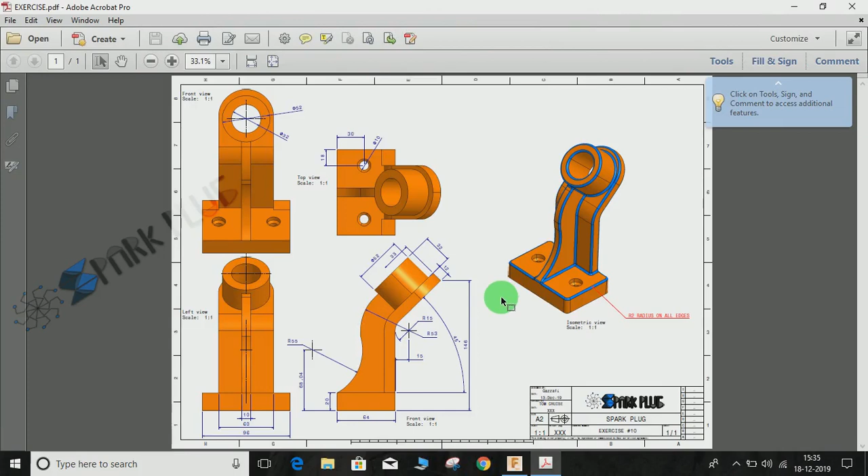In this video tutorial I'm going to show you how to make this body in Fusion 360 using this 2D drawing. You guys can find the downloadable link to this file in the description below, so don't forget to check that out. So what I'm going to do is I will start by making this front view, then I'm going to make some extrusion, some hole commands, and some radius in the end to make this final touch-up.

Remember, the radius of R2 has been removed from all the views except from the isometric view to better understand the dimension. So I will start by making this profile.

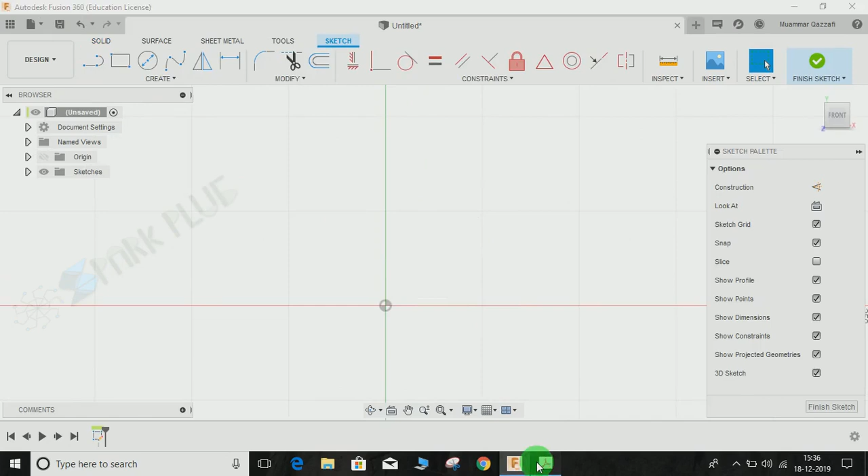For that, just go to select sketch and go to front plane. Now I will start by making this bottom rectangle of 64 by 20. Select a 2-point rectangle, draw a rectangle like this, press D for dimension, give this a dimension of 60 and give this a dimension of 20 like this.

Once done, I'm going to draw this profile like this. As you guys can see, the distance from this point to this point is given 146, and also the angle between this line and this point is given 45 degrees.

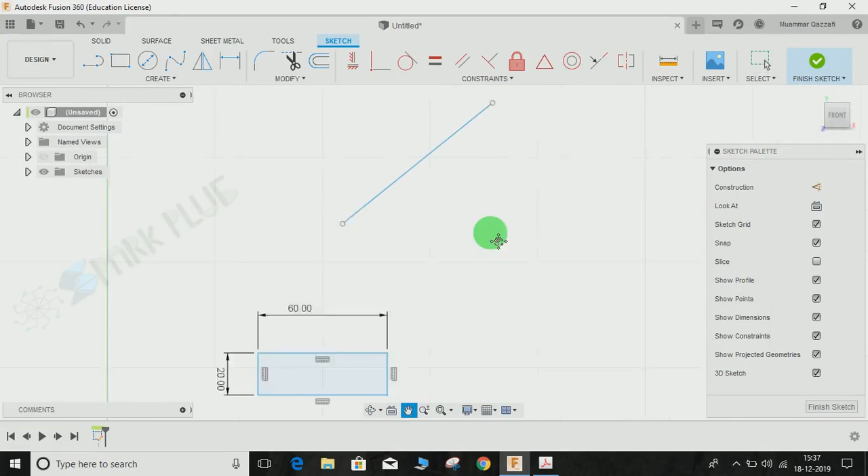So what I'm going to do is I will draw a rough line like this and press D for dimension. From this point to this line, I'm going to give it angular dimension of 45 degrees. Once done, I am going to select this point and the bottom line, and the dimension as written here is 146. So I'm going to give this dimension of 146 and press enter.

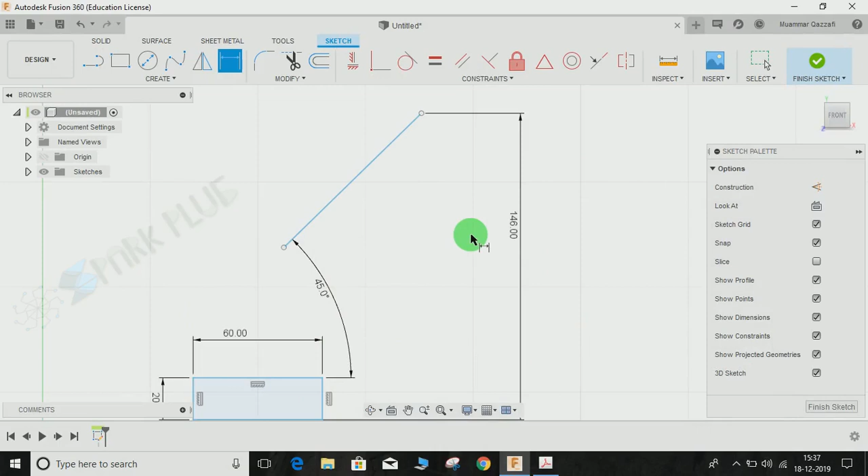Now what I'm going to do is I'm going to extrude this line from this point till the point it joins. Press T for trim, remove these two lines like this.

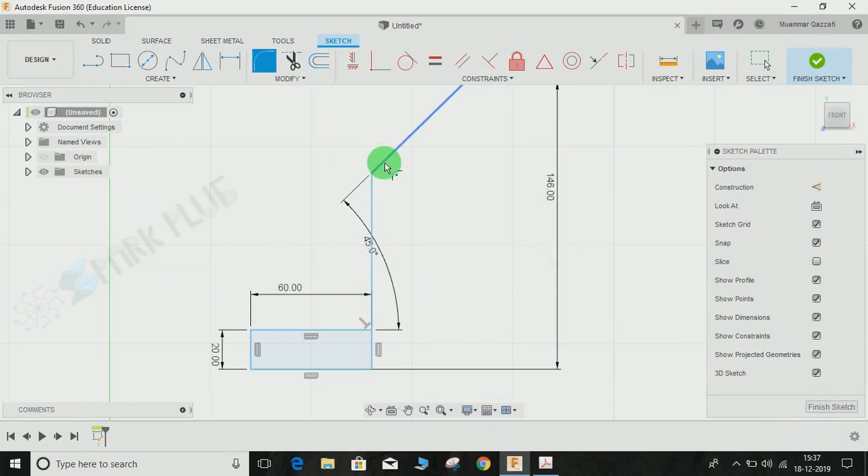Once done, I'm going to make a radius over here, and the distance for radius is given here, it's R15. So I'm going to select the fillet, select these two lines and give it a radius of 15.

Now once done, I'm going to give it a thickness of 12 mm. As you guys can see, this profile is offset by 12 mm to make this rectangular profile here. For that, I'm going to select this line, this radius and this line, and I'm going to select offset.

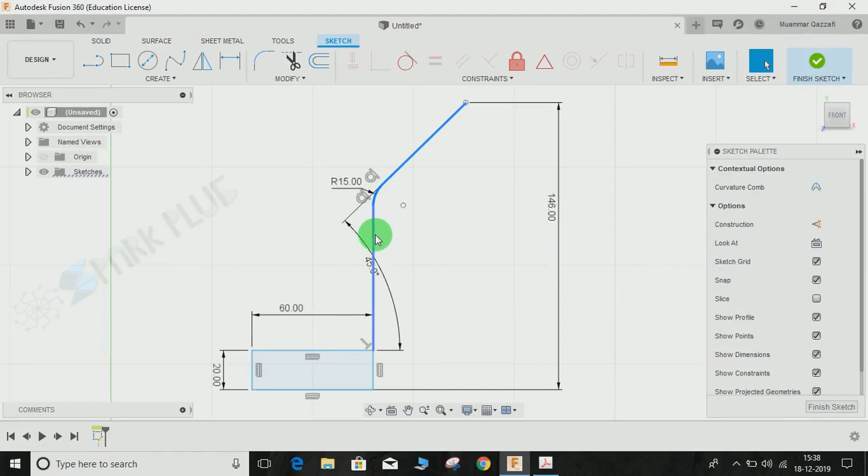Now offset distance direction would be opposite, minus 12, and you may press enter. Once done, press L for line and join these two lines to make the sketch closed. Once done, you may finish the sketch.

Now I'm going to extrude this to a certain distance. If you just look at the right view, the left view, the extruded distance of the bottom rectangle is 96, and this profile, the extruded distance of this profile is 63.

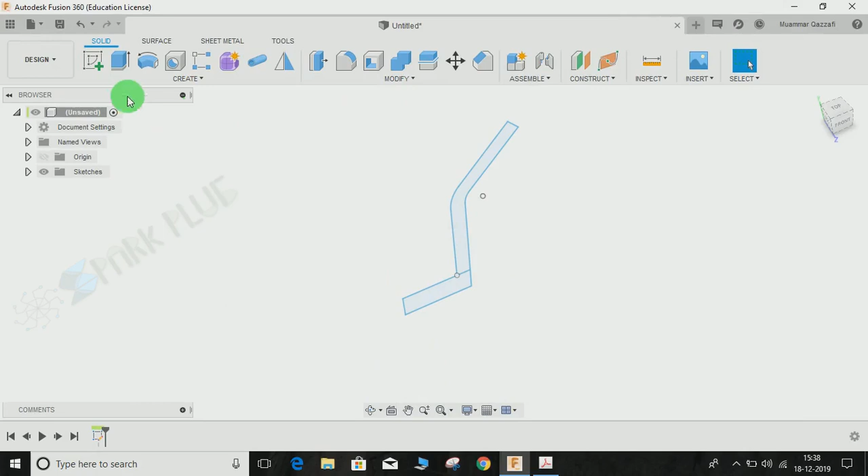So what I'm going to do is I'm going to extrude. The direction would be symmetric. First I'm going to select the bottom rectangle. This time I'm going to select the whole length, and the whole length is going to be 96, and you may select new component and press OK.

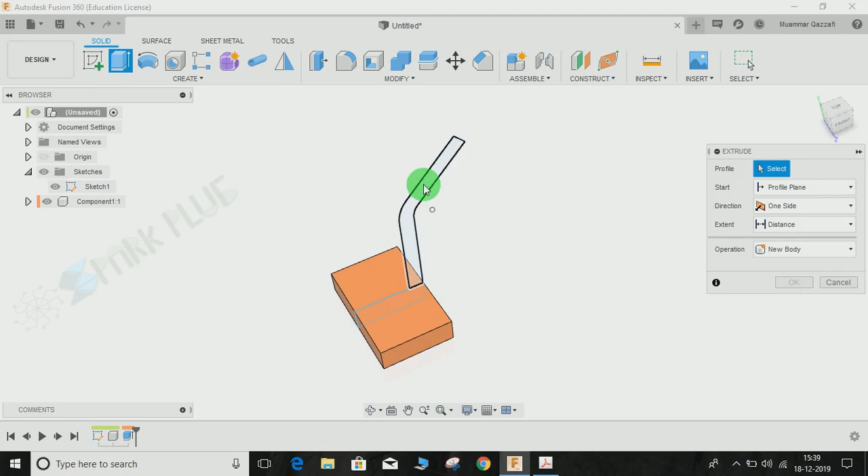Once done, just switch on the sketch again and click on extrude. This time select this part and the operation would be join. The direction would be symmetric, and select the whole length, and the distance would be 60 mm like this. Now you may hide the sketch as we don't need them now.

Now if you just look closely on this circle, this is a circle and the dimension of this circle is given here. The outer dia is 52 mm, and the distance from the center to the end point is given 30 mm, and the extrude distance is 30 mm.

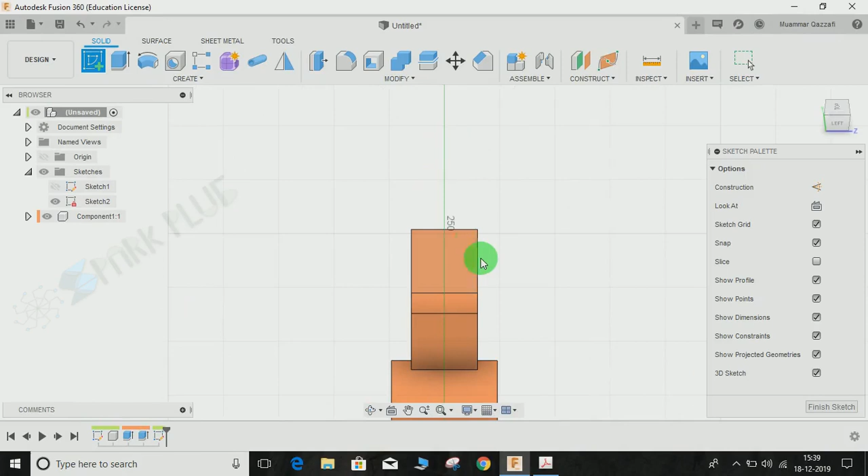So what I'm going to do is I'm going to make this whole circular profile. For that, I'm going to create a sketch on this plane like this. Draw a circle from the very center, and the dia would be 52 as given here. The dia is 52 and the distance from the outermost point is 33.

So what I'm going to do is I'm going to press D for dimension, select this point and this line and give it dimension of 33, and you may press enter.

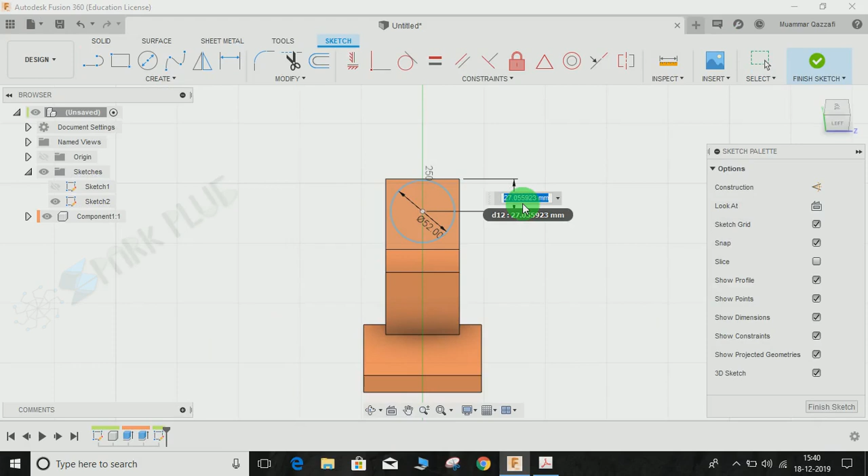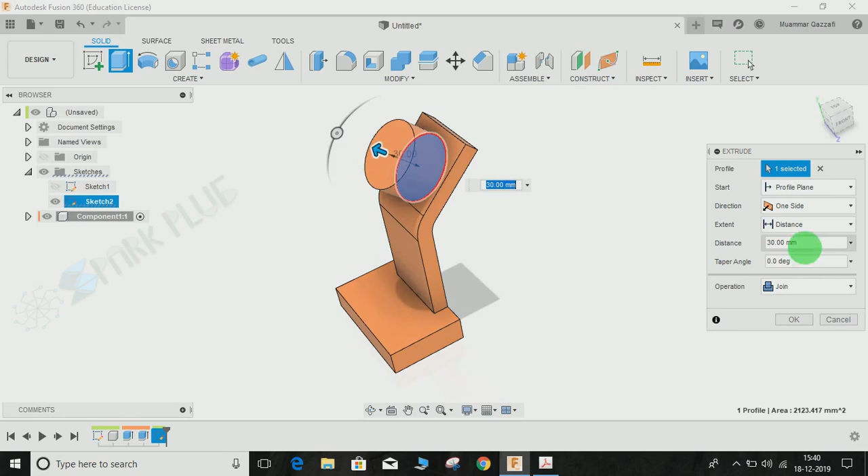Now once done, I'm going to extrude it up to a distance of 30 mm. Finish the sketch and click on extrude, select the circle like this and extrude it up to a distance of 30. The operation would be join, and press OK.

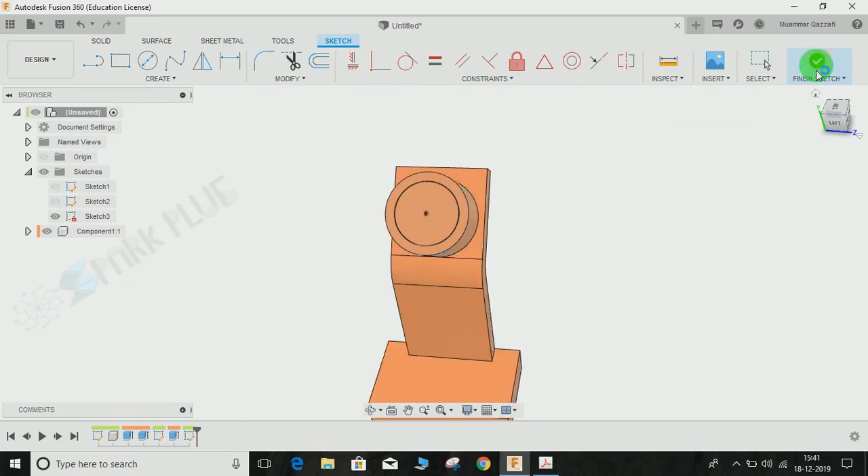Now once done, again click on this circle and press C for circle, and draw a circle of radius 20 mm, that is dia 40 mm, and we are going to drill a hole through it. So for that, just extrude it and the operation would be cut.

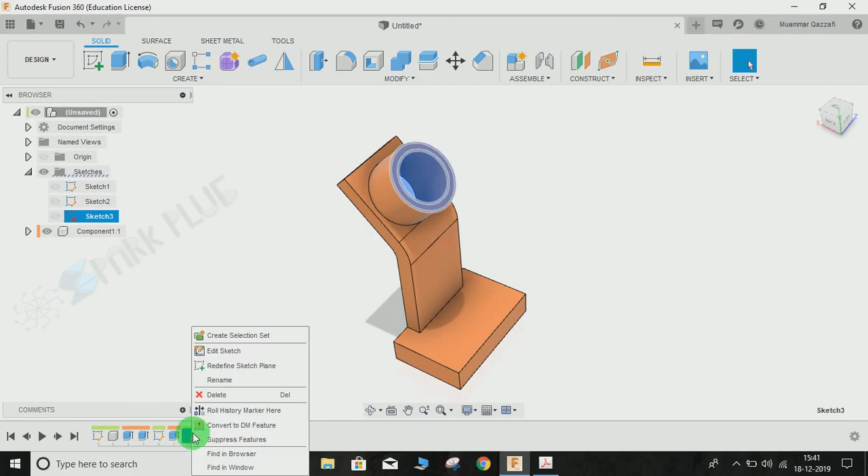Now once done, I need to select the dia. We've just drilled the hole, but the dia of it is going to be 32, not 40 mm. So what I'm going to do is right click on this sketch, click on edit sketch, and give it the dia of 32, then finish the sketch.

Now once done, click on the fillet command and give these two lines a fillet, and the fillet radius would be 30 mm, and press enter. It will look something like this.

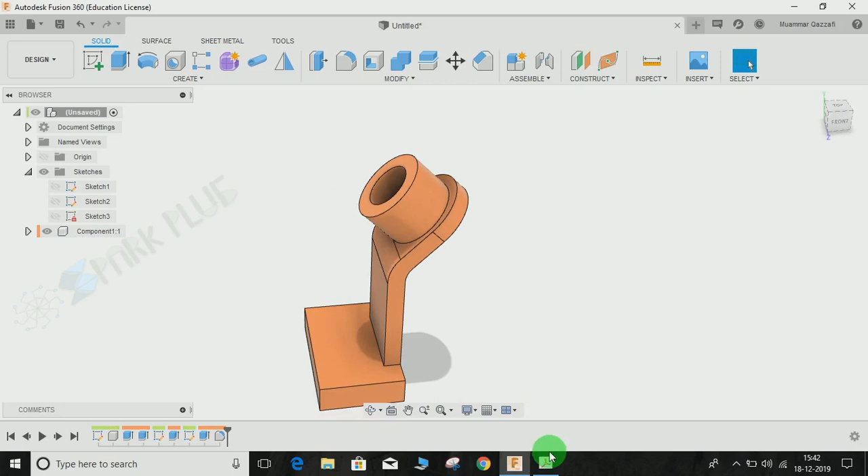Now the last step is to make this S-like profile in the front plane, right in the middle, and the extrude direction thickness, given in the very left view, is 10 mm thick. So what I'm going to do is click on create sketch, and right in the front plane I am going to create the sketch for that.

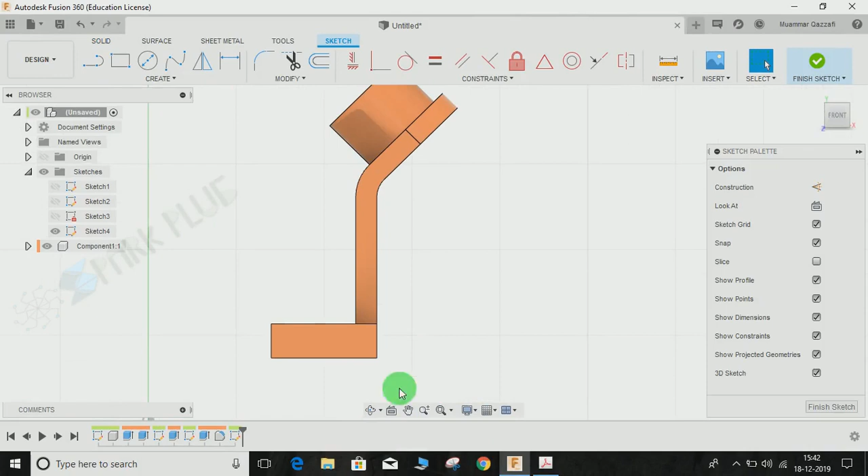So what I'm going to do is press P for project, and I'm going to project this line and this line, and also this one, and press OK.

Now once projected, what I'm going to do is make two circles like here, given here. This circle is going to be concentric with the radius one, and the center of this circle is given here.

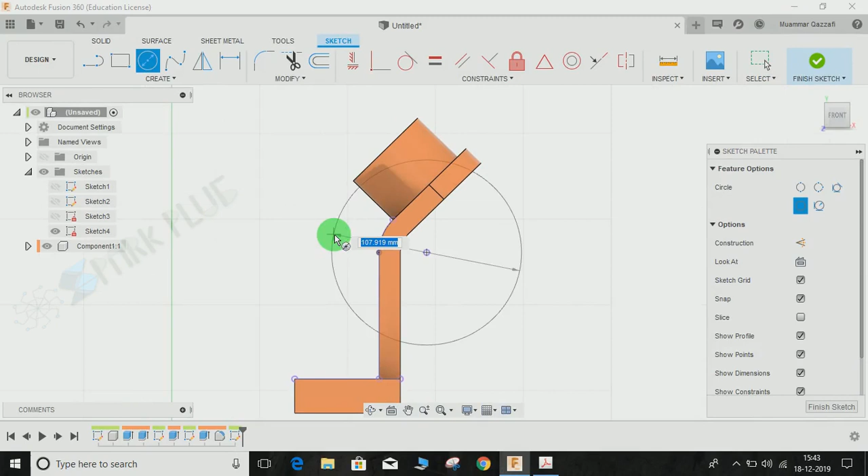The first circle is of radius 53, as you guys can see here. So I'm going to make a circle right from this point with a radius of 53. 53 multiplied by 2 is 106, like this.

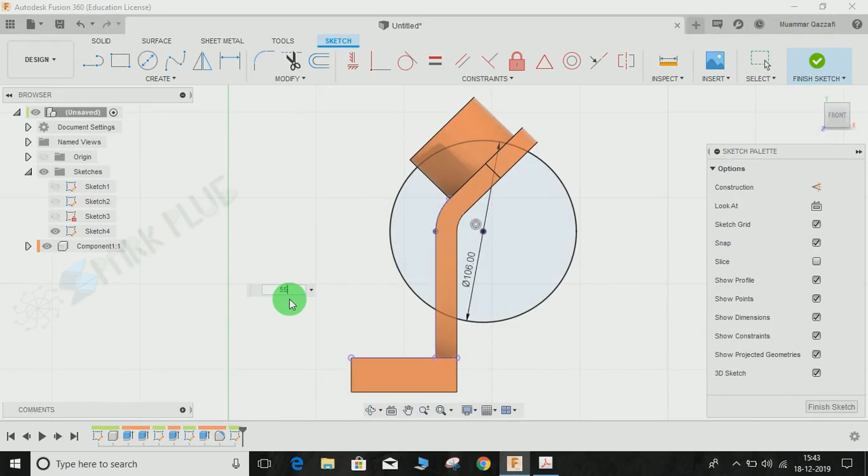And the other circle of radius 55. So draw a circle somewhere here of radius 55 into 2. The dia is 55 into 2, that is 110.

Now once done, I need to make the tangent relation between these two circles, and the second thing is I'm going to make a coincident relation between this point and this circle.

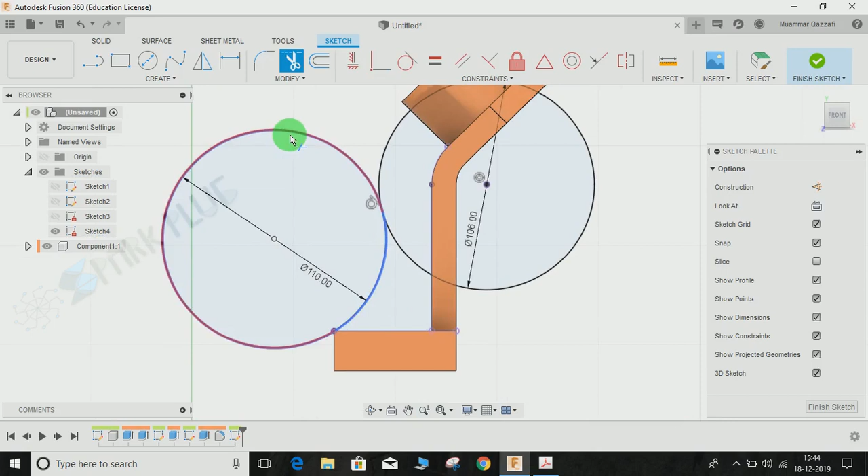Now once done, press T for trim to remove the excess lines. I'm going to remove this line, not this one.

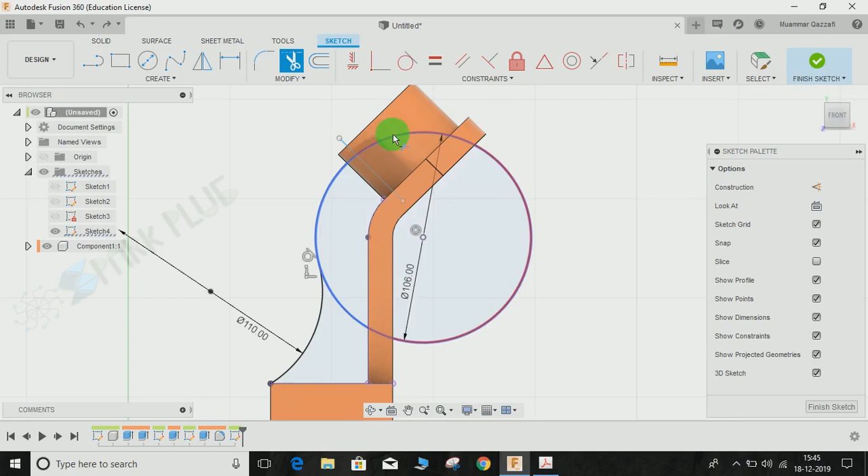One thing I also need to do, the sketch is not closed yet, so I'm going to press P for project. Now I need to draw a rough line like this over here. Press T for trim, just trim this line. No, press Ctrl Z. We are going to trim this line, then trim this one. Yeah, now the sketch is closed.

I need this closed figure. Now you may finish the sketch.

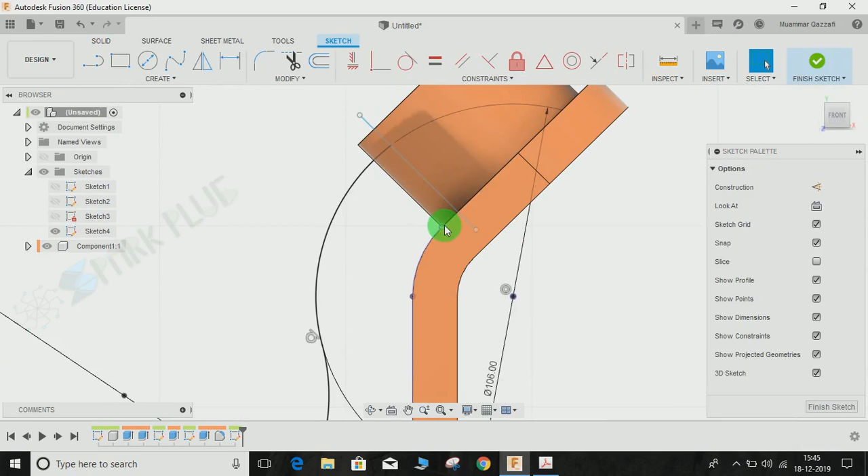I think the sketch is not closed yet. Again, just go back and click on the sketch. Yeah, our sketch is not closed, this is open. So draw a line from here to here so that our sketch is now closed. Now you may finish the sketch.

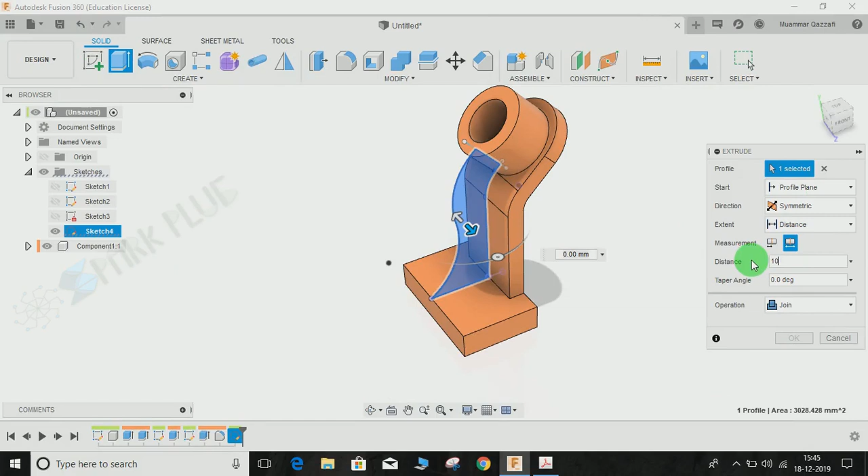Remember the thickness was given here, 10 mm. So press extrude, the command would be join, the direction would be symmetric, whole length, and the distance would be 10, and press OK. Now this is how our body will look like after completion.

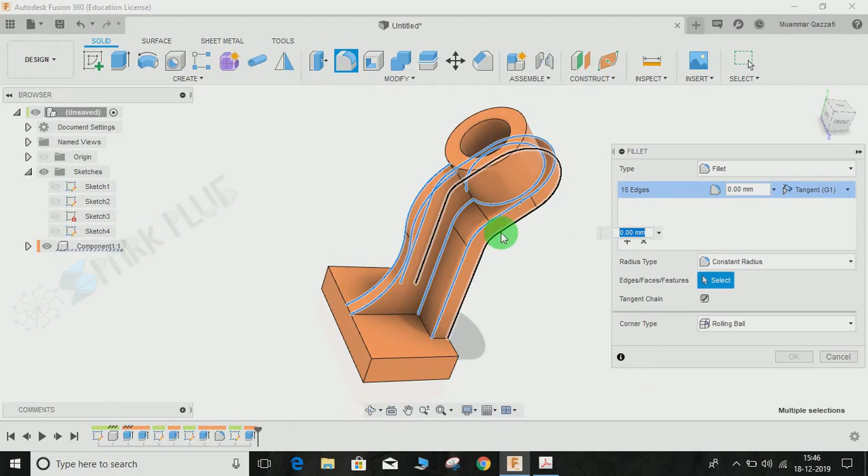Now the only thing left is to provide these radius of 2 mm all across the edge. So for that, just click on fillet, select this line, these edges like I'm doing here, select all the edges that are visible to you and press 2, and give the radius like this.